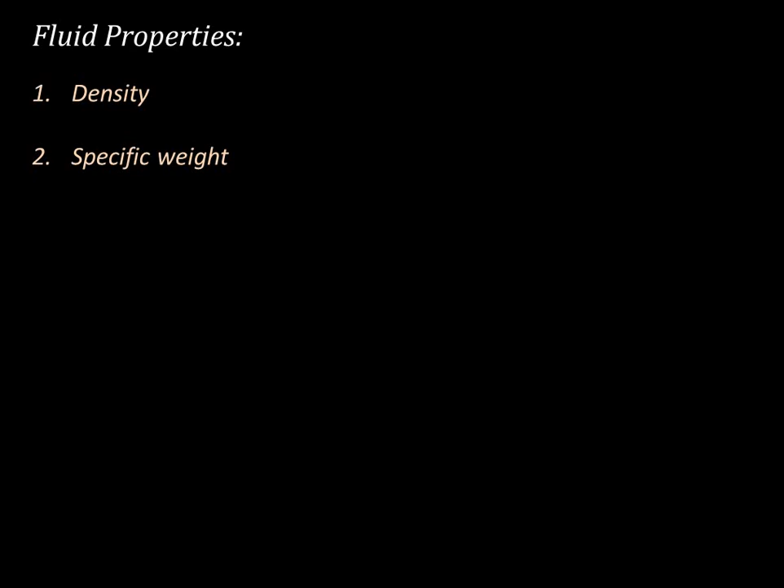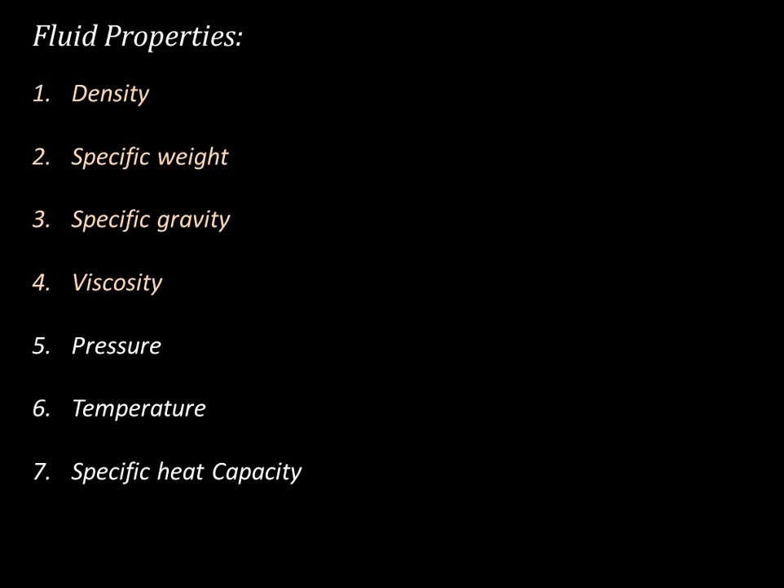In this video we will start learning about properties of fluids. As we have seen in the previous video, there are various properties such as density, specific weight, specific gravity, viscosity, pressure, temperature, specific heat capacity, etc. We are going to learn these properties based on their definition, calculation, units, interpretation, application and considerations. So let's move ahead with the density.

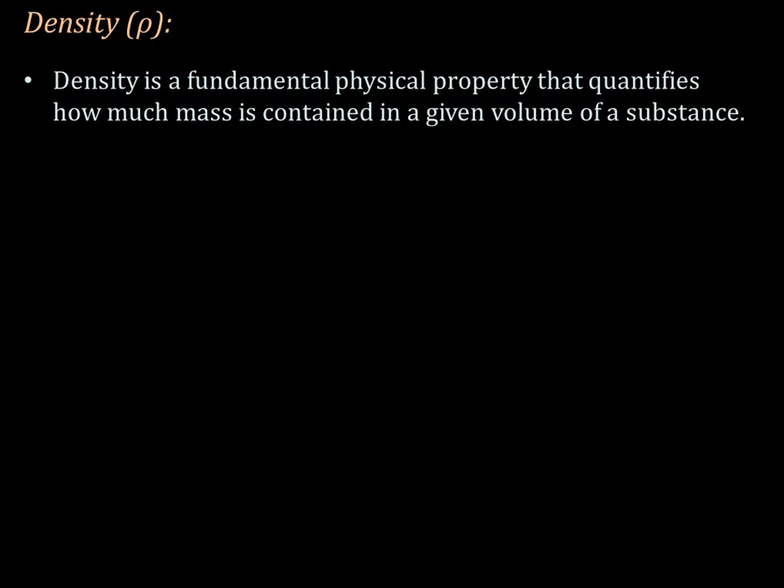So what is density? Density is a fundamental physical property that quantifies how much mass is contained in a given volume of a substance. It is typically denoted by the symbol rho and it is expressed in units such as kilograms per cubic meter, kg per meter cube, in the SI units, or grams per cubic centimeter, gram per centimeter cube, in the CGS system.

The density of a substance is calculated using the formula. The formula is based on the definition. Density is a fundamental physical property that quantifies how much mass is contained in a given volume of a substance. So for a particular volume of substance, how much mass will be contained in that volume, that is density.

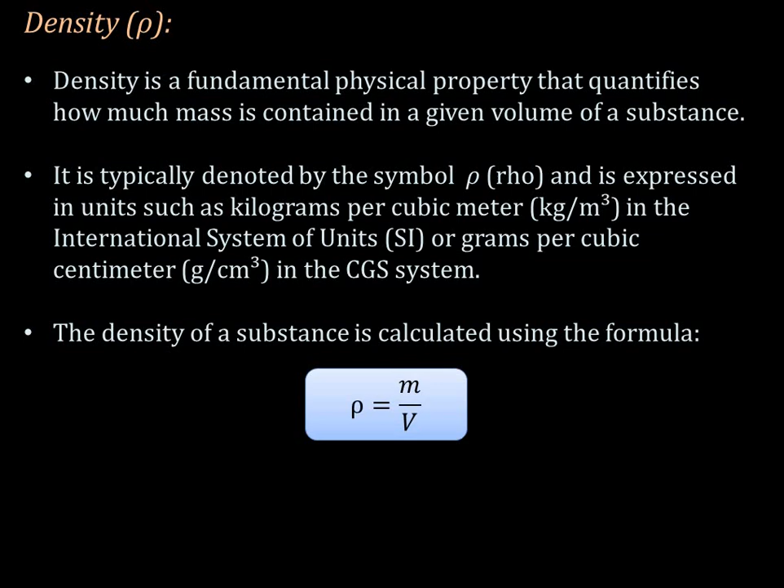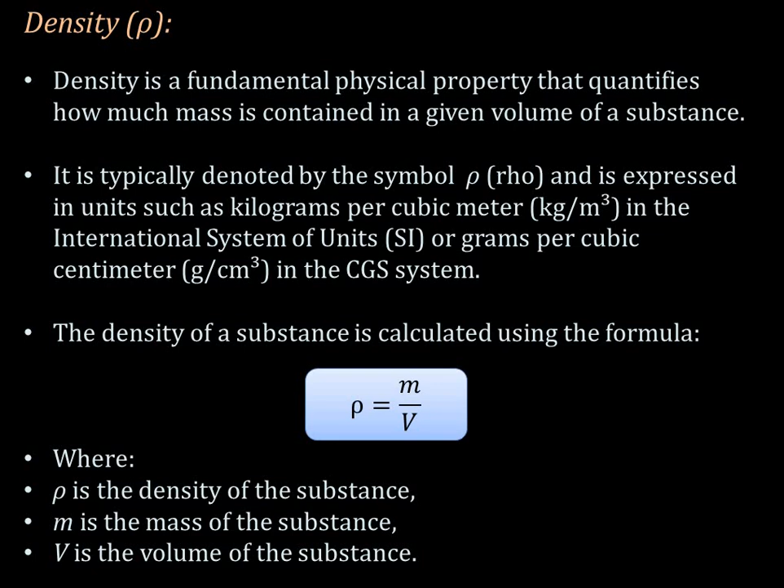So the formula will be rho equals m by v, where rho is the density of the substance, m is the mass of the substance, and v is the volume of the substance. So density can be calculated by the formula rho equals m by v, mass contained in a given volume of a substance.

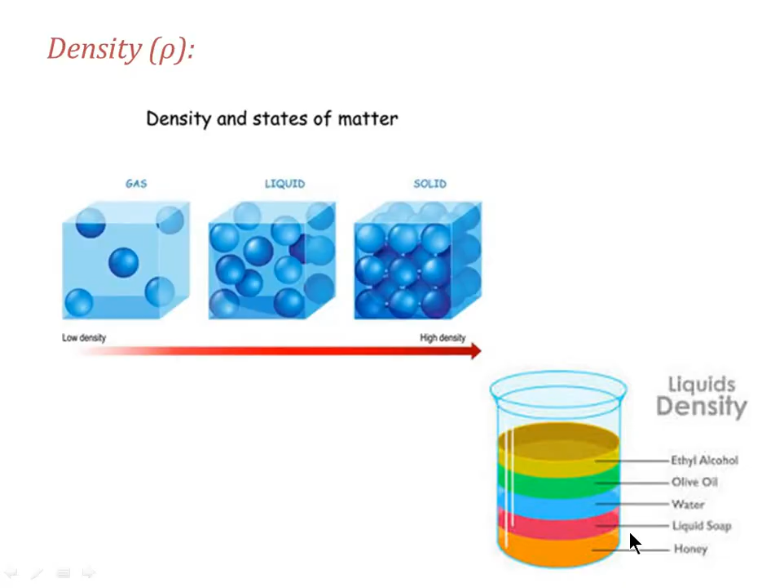Some oils have less density than water, that's why they float on the surface of water, whereas honey or any dense liquid, as it has more density, settles down in water; they don't float. So the density of a substance is calculated by the formula rho = m/v. In other words, density represents the amount of mass per unit volume. So if the mass of an object is spread out over a large volume, it will have a lower density, just like in gases, compared to the same mass concentrated in a smaller volume.

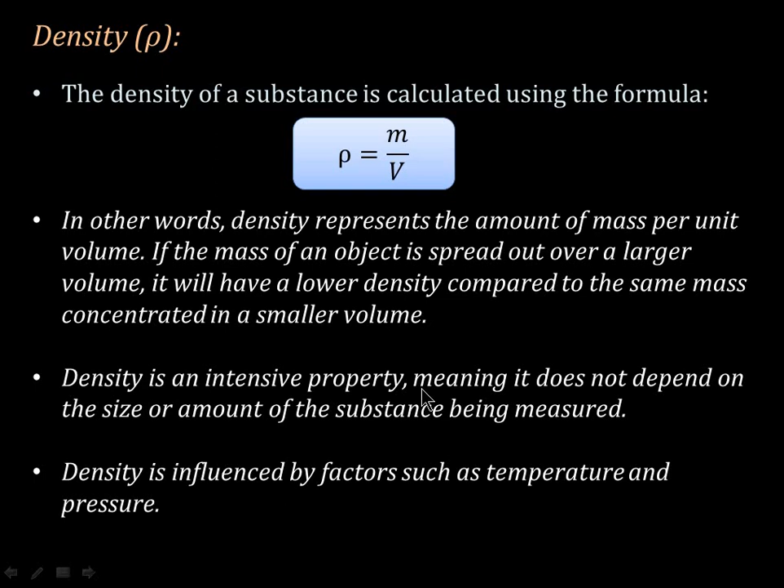Now, density is an intensive property. That means it does not depend on the size or amount of the substance being measured. So whatever substance we are measuring, irrespective of its amount, the density can be calculated. Density is influenced by factors such as temperature and pressure. Okay, this is about density. Let's move ahead to the second property.

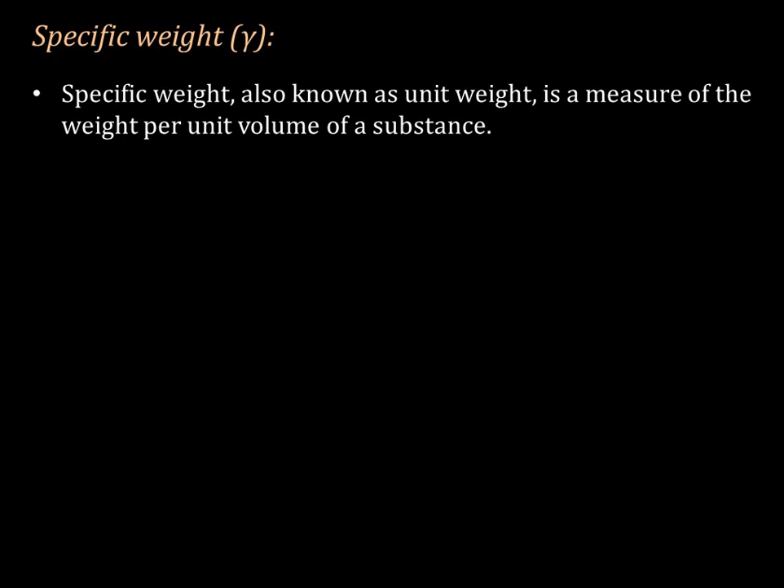The next property is specific weight, which is denoted by gamma. Specific weight, also known as unit weight, is a measure of weight per unit volume of a substance. Density was mass per unit volume of a substance, and specific weight is weight per unit volume of a substance. It is typically denoted by the symbol gamma and is expressed in units such as newtons per cubic meter, or pounds force per cubic foot.

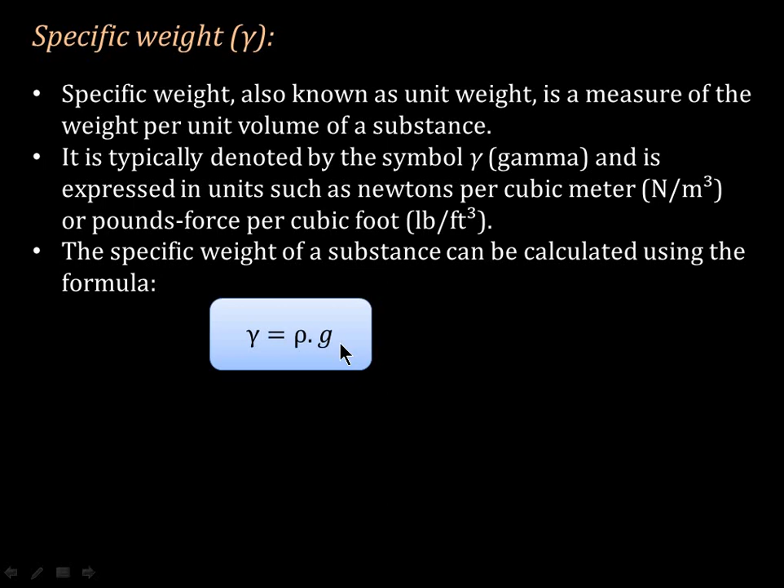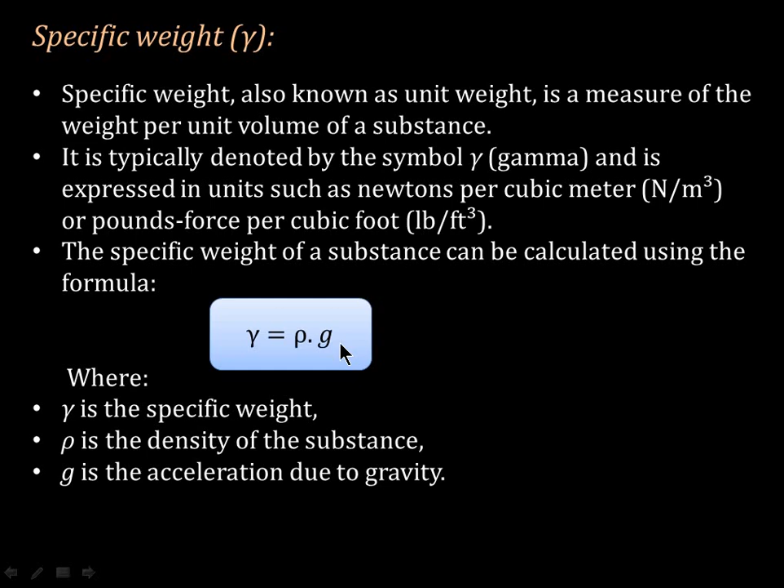The specific weight of a substance can be calculated using the formula. This formula is again dependent on the definition. Gamma = rho × g. So we can say that specific weight is nothing but the density of the substance, but also considering the acceleration due to gravity, where gamma is specific weight, rho is the density of the substance, and g is the acceleration due to gravity.

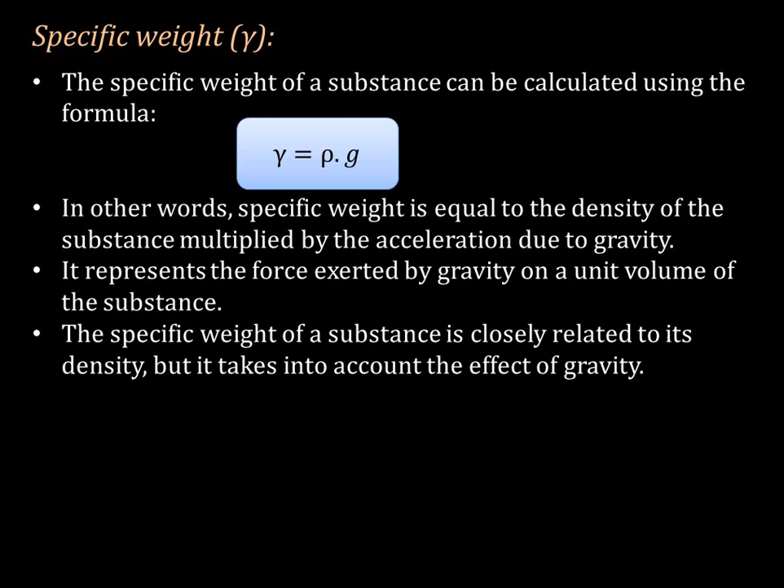Now, the specific weight of a substance can be calculated using the formula gamma = rho × g. So in other words, specific weight is equal to the density of the substance multiplied by the acceleration due to gravity. It represents the force exerted by gravity on a unit volume of substance. The specific weight of a substance is closely related to its density, but it takes into account the effect of gravity. Basically, specific weight and density are related to each other only through acceleration due to gravity.

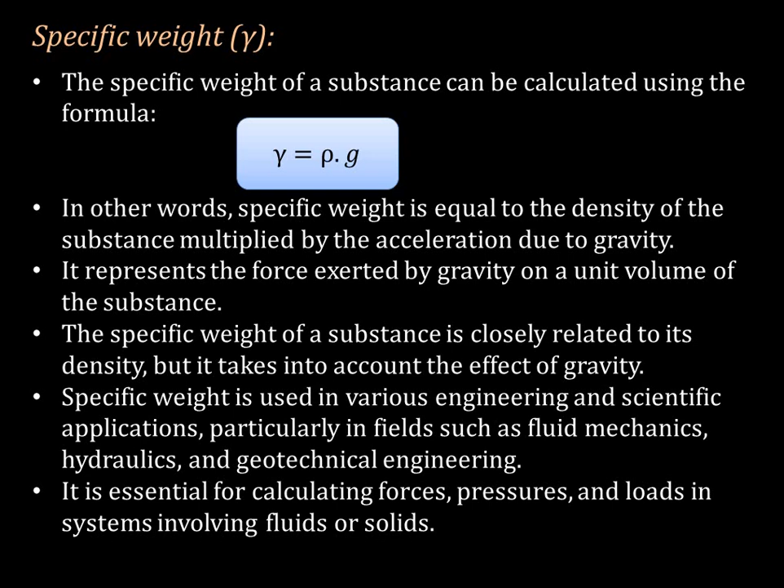Specific weight is used in various engineering and scientific applications, particularly in fluid mechanics, hydraulics, and geotechnical engineering. Now, why do we need to study specific weight? Because calculating specific weight helps us calculate various forces, pressures and loads in systems involving fluids or solids. So let's study the next property, specific gravity, denoted by Sg.

Specific gravity is a dimensionless quantity that compares the density of a substance to the density of a reference substance. So basically there are two densities: one is the density of the substance for which we have to calculate the specific gravity, and the other is the density of a reference substance, typically water at a specified temperature and pressure. It is often used to describe the relative density of liquids or solids compared to water.

The specific gravity of a substance is calculated using the formula Sg of substance = rho of substance / rho of water. That is, the specific gravity of a particular substance is the density of that substance divided by the density of water, where Sg of substance is the specific gravity of the substance, rho of substance is the density of the substance, and rho of water is the density of water at the same temperature and pressure.

Since specific gravity is a ratio of densities, see, the specific gravity Sg of a substance is what? It is a ratio of two densities. One is the density of substance, another is the density of water. So as it is the ratio of densities, it is a dimensionless quantity and does not have any unit, because both the units will get cancelled because of being same.

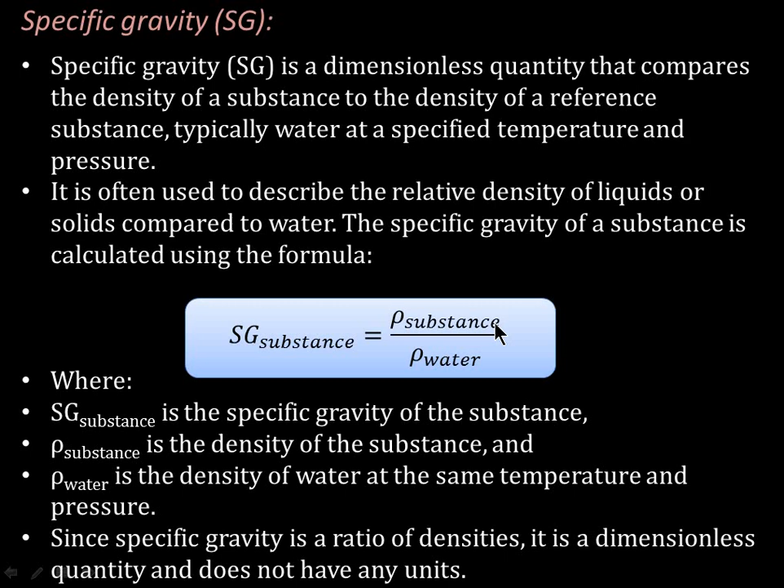Now, the specific gravity of water at 4 degrees Celsius is typically used as the reference point, because water has the density of 1 gram per cubic centimeter. So this 1 is taken as the reference, whose value when converted to SI unit system is 1000 kilograms per cubic meter at this temperature. So as a result, substances with a specific gravity greater than 1 are denser than water, while those with the specific gravity less than 1 are less dense than water. So the density of water or the specific gravity of water is considered as reference.

Specific gravity is commonly used in various industries and applications, including determining the concentration of solution in chemistry and similar industries, assessing the buoyancy of the objects in the fluids, calculating density or volume of materials, quality control in manufacturing processes, designing and analyzing hydraulic systems, etc. So this is all about specific gravity.

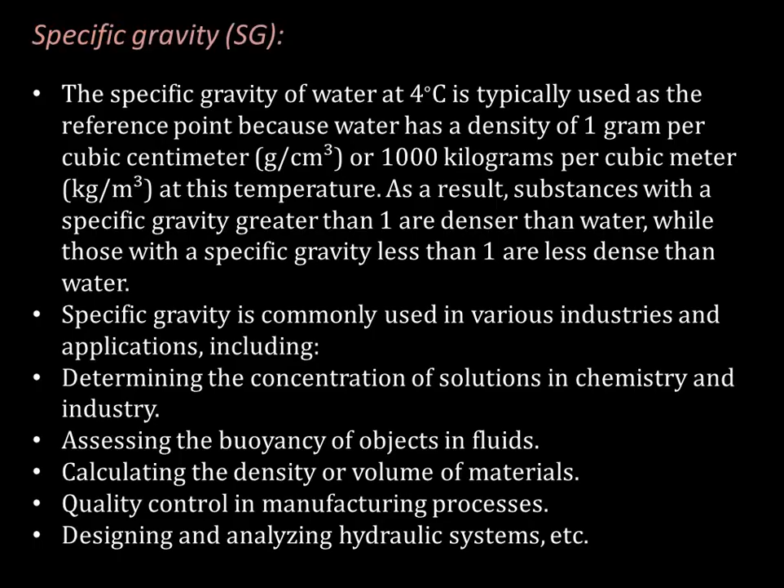Let's move ahead with the viscosity. So viscosity is a fundamental property of fluids that measures the resistance of a fluid to deformation or flow. Resistance of a fluid for flowing. Viscosity is a fundamental property, a basic property of fluid. And what it is measuring? It is measuring the resistance offered by the fluid for flowing. In simpler terms, it is a measure of fluid's thickness or resistance to flow.

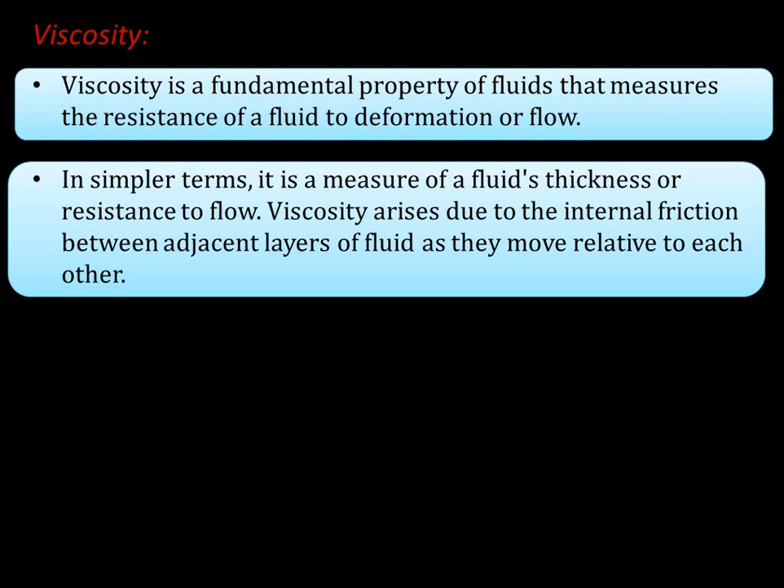Viscosity arises due to the internal friction between adjacent layers of fluid. Now, how viscosity arises? There is a friction between internal particles or internal layers of fluids as they move relative to each other. Now, through this diagram, we can understand about the viscosity. So, here we can see that there is a plane surface, and consider that there is a fluid over this plane surface.

Now the bottom layer of the fluid will be near to this surface, and as the velocity of this surface is 0, therefore the velocity of that bottommost layer will also be 0. But as we move upwards towards the upper layers of the fluid, see, there is a plane surface and a fluid having certain density above the plane surface. The bottommost layer will be having very negligible velocity because it is in contact with the bottom surface.

But as we move upwards in the y direction, as the distance from the bottom surface increases, the velocity will also increase, because they will not be bound to the bottom surface and there will not be any restriction on them for flowing as compared to the bottom layer. So the fluid velocity will go on increasing, and that's why we can say that the velocity profile will be in this way: velocity goes on increasing as the distance from the bottom surface increases.

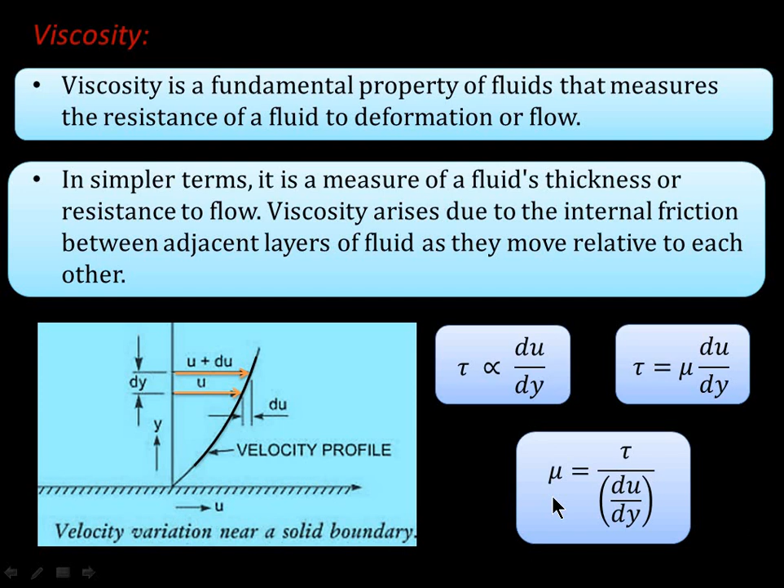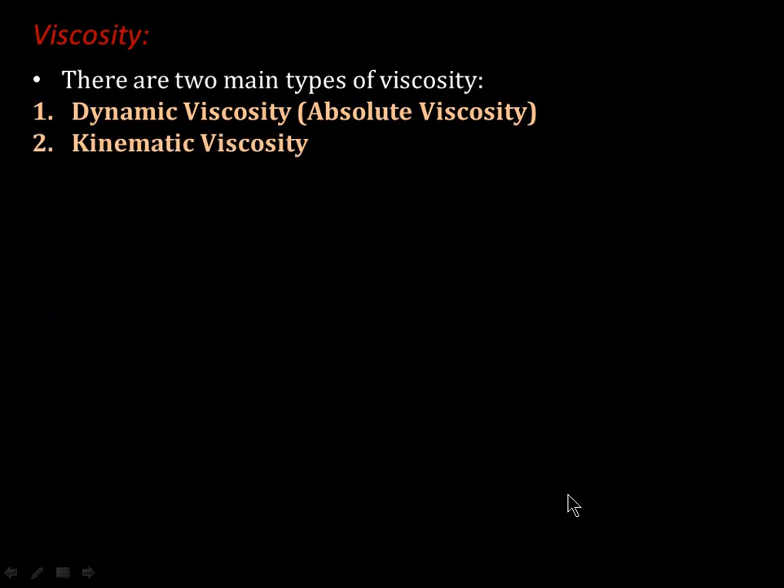So by rewriting this equation, we can have mu is equal to tau divided by du by dy. So this mu is nothing but the dynamic viscosity. There are two main types of viscosity. One is dynamic viscosity, also known as absolute viscosity. Second is kinematic viscosity. Dynamic viscosity, also known as absolute viscosity, is often denoted by the symbol mu, and it is a measure of the resistance to shear or tangential flow within a fluid.

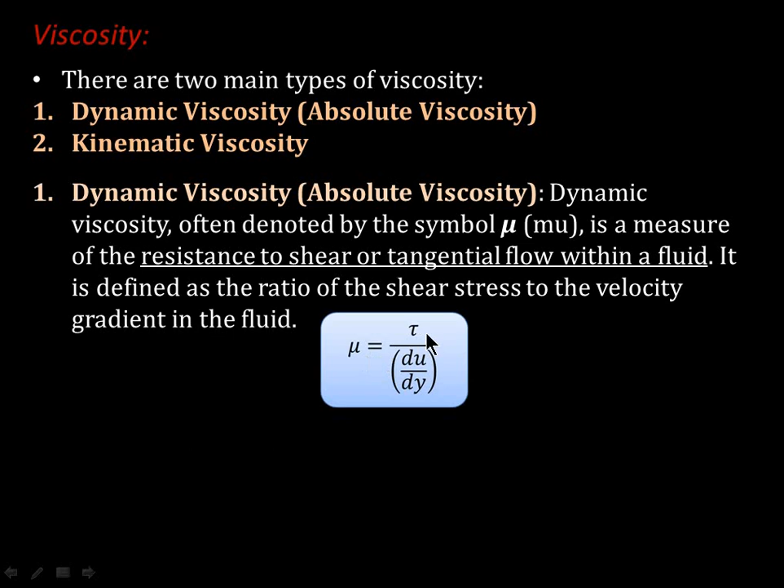It is defined as the ratio of the shear stress to the velocity gradient in the fluid, just as we saw in the previous slide. So mu is equal to tau upon du by dy. Dynamic viscosity is expressed in units such as Pascal seconds or Newton second per meter square in the SI system, or poise in the CGS system. Dynamic viscosity mu equal to 1 poise. The conversion of poise to Newton second per meter square is 1 by 10. So 1 poise is equal to 1 by 10 Newton second per meter square in SI unit form.

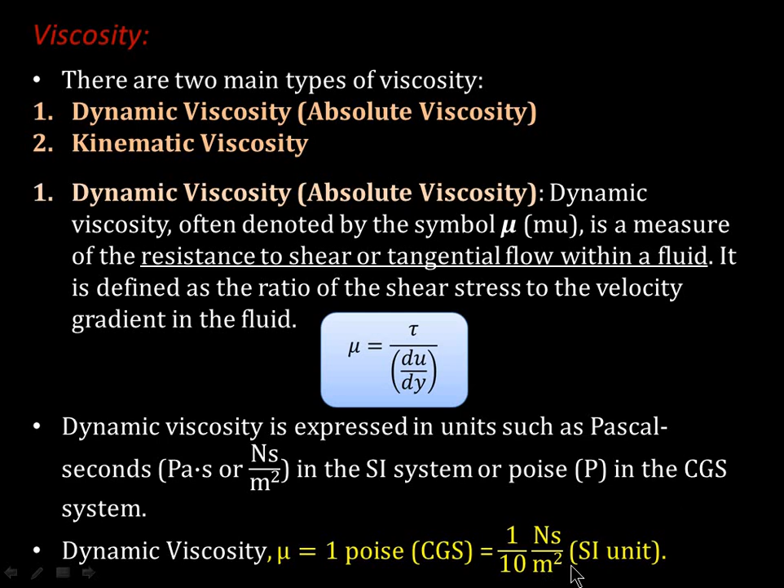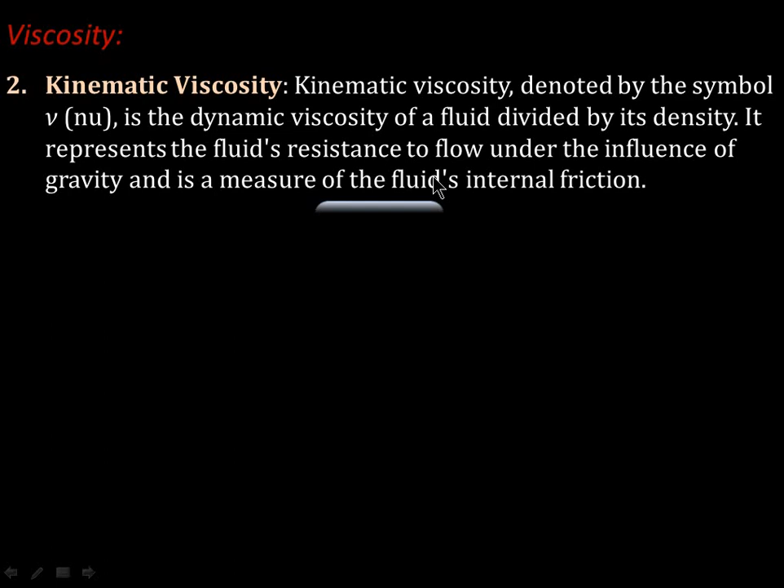So next is kinematic viscosity. Kinematic viscosity, denoted by the symbol nu, is the dynamic viscosity of a fluid divided by its density, so mu by rho. It represents the fluid's resistance to flow under the influence of gravity and is a measure of the fluid's internal friction, friction between internal fluid particles. So it is denoted by nu equals mu by rho. Kinematic viscosity is expressed in units such as meter square per second in the SI unit, or Stokes in the CGS system.

Kinematic viscosity nu equal to 1 Stoke in the CGS system is equal to 1 centimeter square per second, which can be converted to 1 by 100 whole square meter square per second in SI unit form. Now as 1 meter equals 100 centimeters, similarly 1 Stoke equals 100 centistokes. Now what is the relation between kinematic and dynamic viscosity? The relation comes with the help of density. Kinematic viscosity is the dynamic viscosity of a fluid divided by its density, that is rho. So nu is equal to mu by rho. So this is about viscosity.

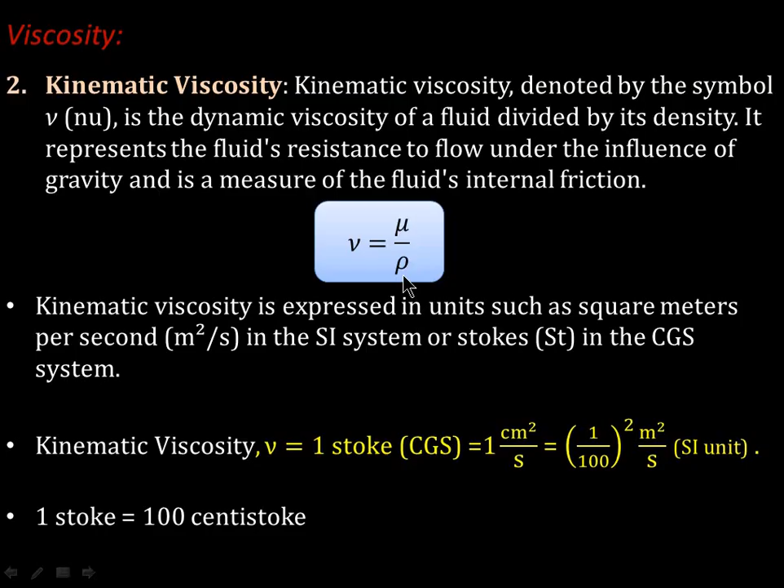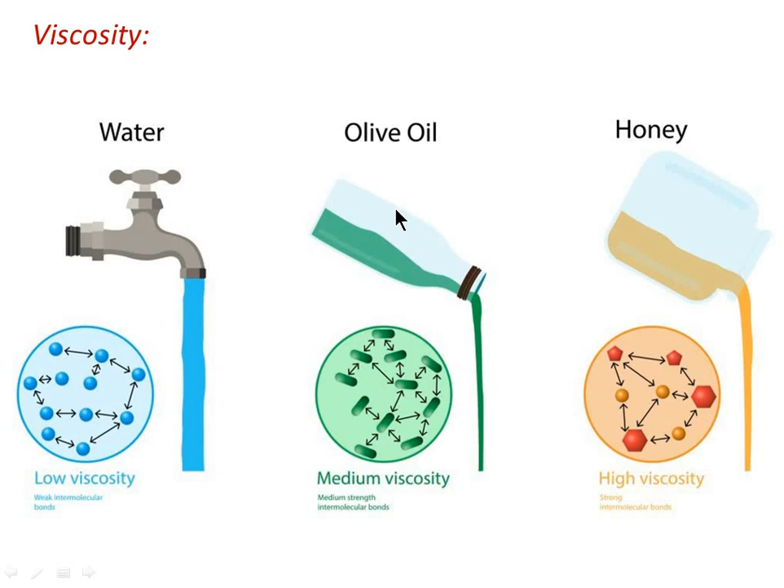Now let's see viscosity through the diagrams. For water, the viscosity is lesser because the intermolecular bonds are weak in the case of water, whereas for olive oil, the viscosity is medium. The strength of the molecular bonds is more as compared to water, whereas in the case of honey, the intermolecular bonds are very strong. That's why the viscosity of honey is higher. So viscosity of water is lower, viscosity of olive oil is more than that of water, but viscosity of honey is much more than that of water and olive oil.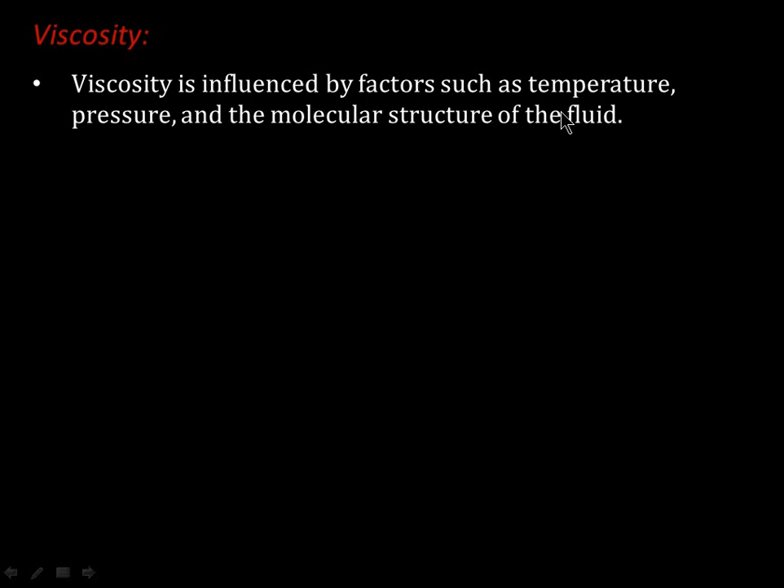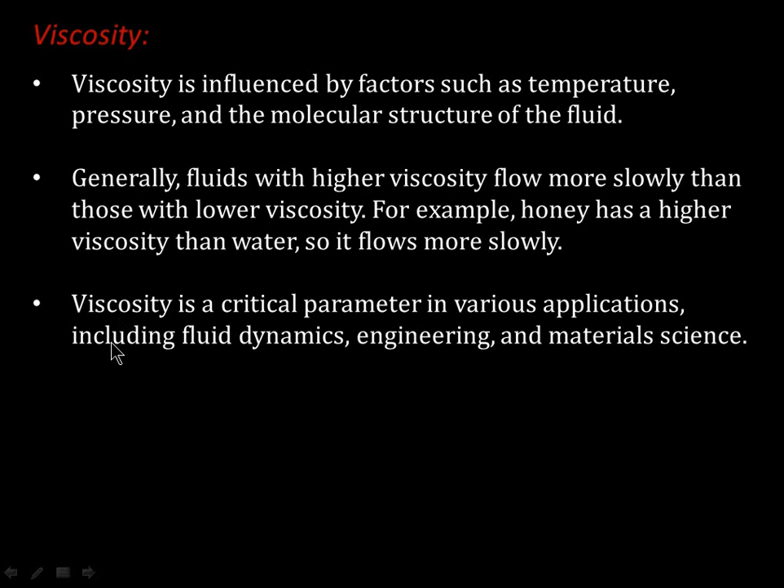So viscosity is a property which is influenced by factors such as temperature, pressure, and the molecular structure of the fluid. Generally, fluids with higher viscosity flow more slowly than those with lower viscosity. So fluids with higher viscosity, like honey, will move slowly, whereas fluids with lower viscosity, like water, will have very high velocity. For example, honey has a higher viscosity than water, so it flows more slowly. So viscosity is a critical parameter in various applications, including fluid dynamics, engineering, and materials science.

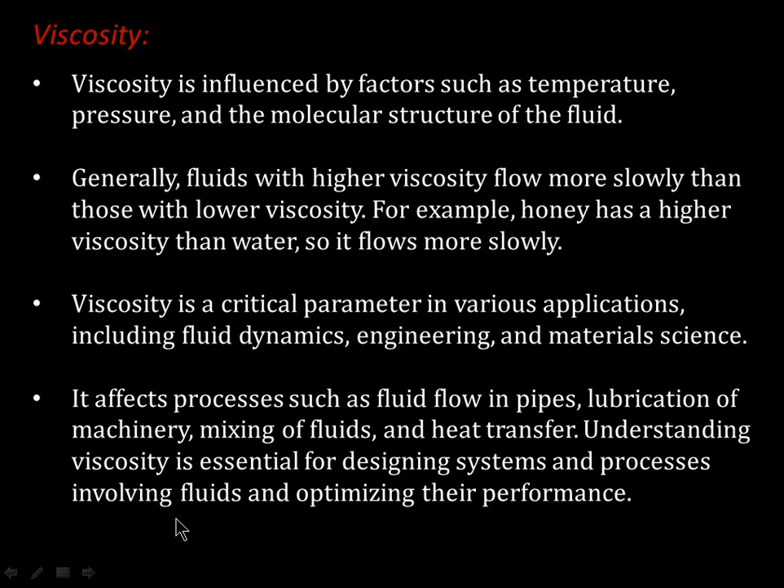It affects processes such as fluid flow in pipes, lubrication of machinery, mixing of fluids, and heat transfer. So understanding viscosity is essential for designing systems and processes involving fluids. Wherever there are fluids, we need to be aware of their properties such as viscosity, density, and so on, for optimizing their performance.

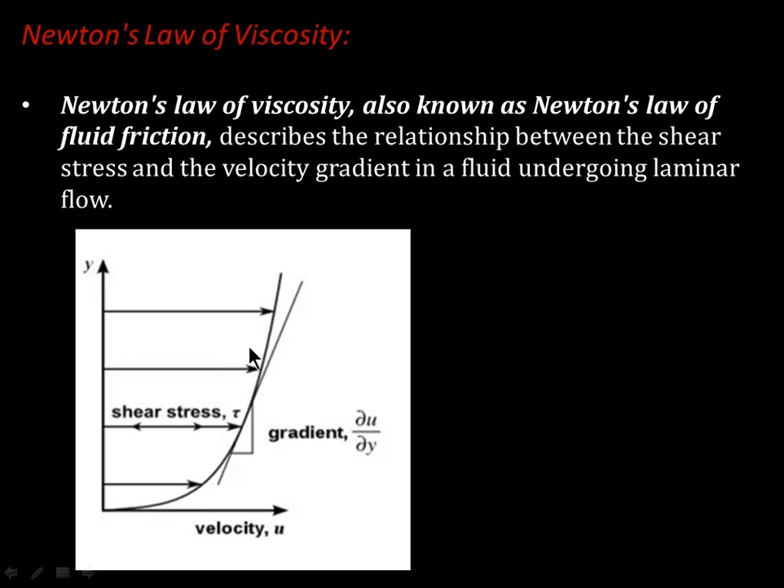As the vertical distance is increased, the fluid particles have more velocity as they are moving away from the bottom surface. So there is a velocity gradient. So tau is equal to mu into du by dy. Now why does this happen? Because the bottom surface is stationary, so the fluid particles in contact with the bottom surface will also behave as stationary.

But the fluid particles above that surface will have a little bit higher velocity, and as we move upwards, the particles will have more velocity, they will be free to move. That's why as the upward distance is increased, the velocity is also increased, and that's why there is a velocity gradient.

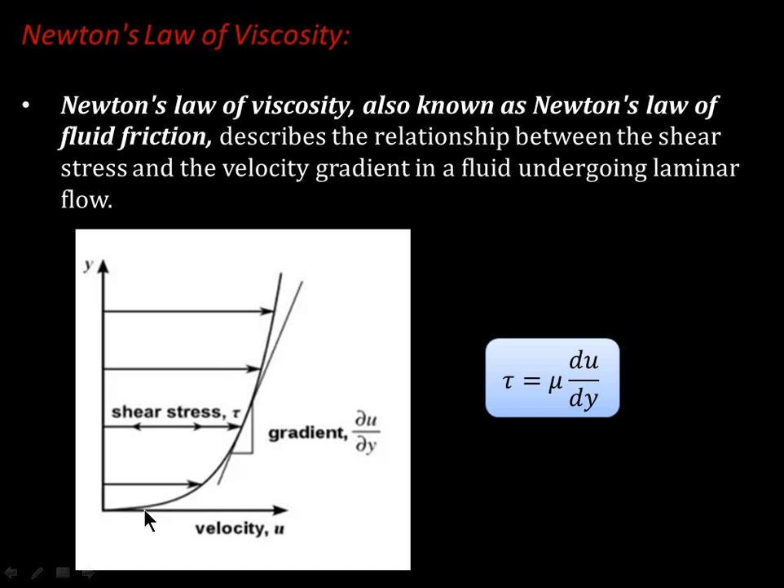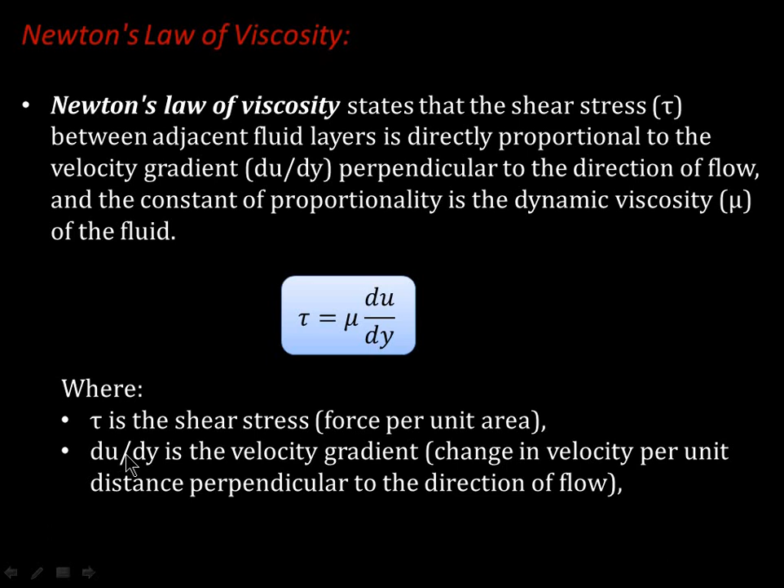Now Newton's law of viscosity states that the shear stress between adjacent fluid layers is directly proportional to the velocity gradient perpendicular to the direction of flow, and the constant of proportionality is the dynamic viscosity of the fluid. So tau is equal to mu into du by dy, where tau is the shear stress and du by dy is the velocity gradient. Du is the change in velocity, dy is the change in distance: change in velocity per unit distance perpendicular to the direction of flow. Mu is the dynamic viscosity of the fluid.

In simple language, Newton's law of viscosity states that the force required to maintain a constant velocity gradient in a fluid is proportional to the viscosity of the fluid and the rate of change of velocity with respect to distance. This is another way of expressing Newton's law of viscosity, since shear stress is nothing but force upon area. So the force required to maintain a constant velocity gradient in a fluid is proportional to the viscosity of the fluid.